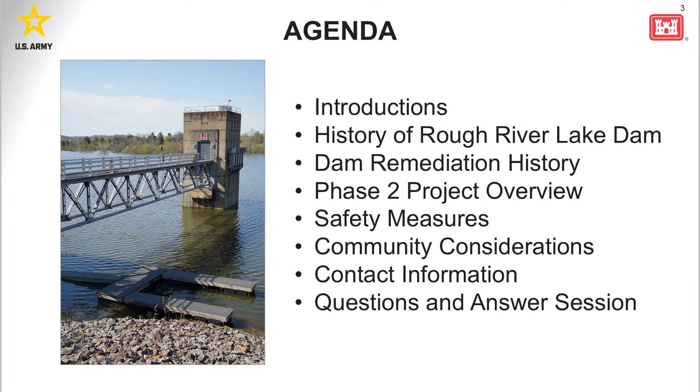My name is Steve Durrett. I am the project manager for this project, so I'm in charge of the funding and orchestrating all of the other pieces and parts associated with this project as we move through it. With that, I'm going to turn it over to Colonel Mann, commander of the Louisville District, to give a few words.

Lord, don't tell me how to do this. Hey, I appreciate everyone being here tonight, and I see you've got a good representation here, and I understand everybody wants us to get through it, so we cut it down from 250 slides of calculations. We've got it down to 12.

We definitely want to make sure everybody gets out to watch the State of the Union tonight. We do appreciate everyone being here. We have a good representation from the Corps. So you met our project manager, Mr. Steve Durrett, and we have Robbie Wheeler, who is the project engineer. Of course, we have John, who runs the park on a day-to-day basis. We've got other Corps folks, just put your hands up in the air here. So we've got operations folks, our smartest hydraulic engineer, Adam Conley, is here.

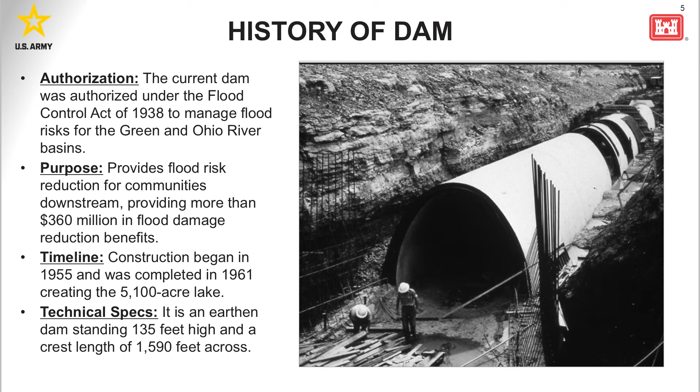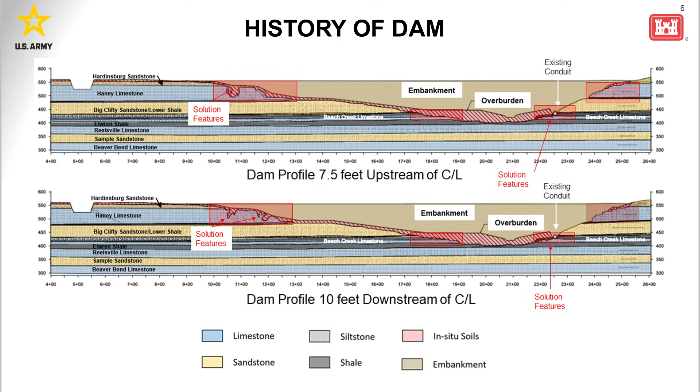And this little dot right over there, that is the existing conduit, and it's sitting right on top of that Beech Creek limestone. So these two formations are two of the reasons why we are really trying to repair this dam and make it safe again in our minds, and for you all to use for the next 50 to 100 years.

The remediation project, what got us to where we are? We started looking at this dam because of issues with instrumentation we had in the dam, monitoring the water levels, how the dam behaved, and so on and so forth.

Back in 2012, the first report was drafted. That report showed that we had some issues with the dam, which led us to do the first phase of the project. Many of you know phase 1A was to move the state highway to the upstream face of the dam. That was in preparation for 1B, which was to do the grouting across.

Drilling holes about every 5 to 10 feet across the entire center line of the dam, upstream and downstream. So we had 2 lines of holes every 10 feet along the crest of that dam, for 2 reasons. One was to understand what that limestone really looked like, how bad it was, where the voids were, both in the Haney as well as the Beech Creek.

The second piece of that is, since you already had a hole in the ground, let's fill it full. We cleaned it out the best we could, and we filled it full of concrete, or what we call grout. Again, that is basically a patch. All we did was fill voids. We really didn't wash out any of the clay, which naturally washes out over time by Mother Nature and just water moving through the Earth's foundation. So that gave us the details we needed to understand.

The second problem of this project really revolved around this conduit. How do you get under the conduit? The original plan was to cut through this conduit, leave it active, cut through it, and then patch it when we were done. After getting reviewed by the Corps, as well as some outside experts we involved, that was not a good idea.

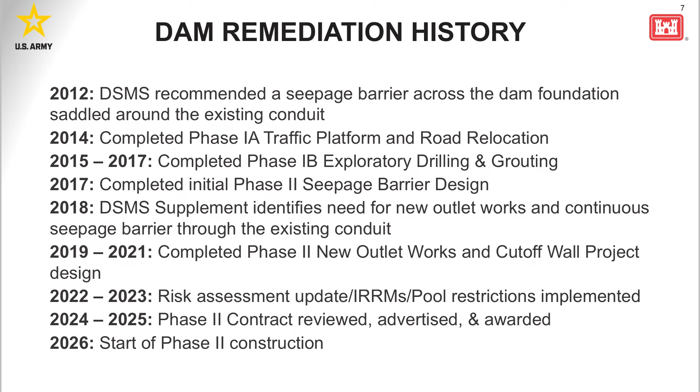And we have continued to look at this project over the years, as you can see from the dates on the slide. Again, I talked about left abutment and right abutment. I wanted to explain the nomenclature we use in the Corps. We always look downstream, that tells you what's left and what's right. So when we refer to things and you hear the word left abutment, you just turn downstream, and left is left and right is right. That's probably the important thing.

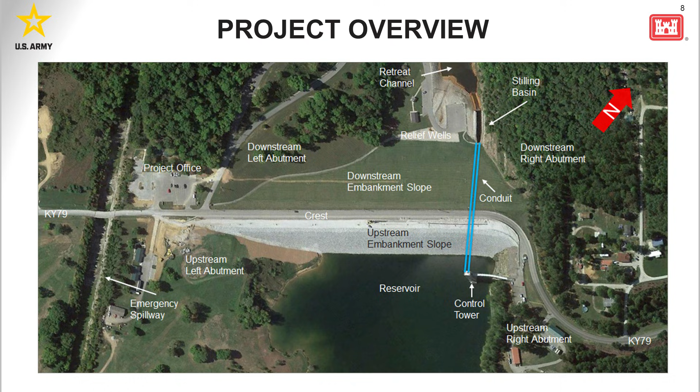The existing conduit and the control tower, the conduit will eventually be filled full of concrete and abandoned in place. Our new conduit will go across the left side of the dam, the left abutment of the dam. So we have awarded a contract. The contract is what the Corps of Engineers refers to as a base and option contract.

So we have awarded the base contract. The base contract is the control tower, the tunnel, the stilling basin, and the new retreat channel, the new exit channel into the existing river downstream. That is our base contract.

Option 1 will be to add the approach channel to get water from the lake into the control tower. As part of building the control tower, we will have to build what we call a cofferdam. It will be built initially across here to make sure that area of the control tower stays dry, so the contractor can work in the dry.

And we're not impacted by fluctuation in lake levels. Then option 2 is shown, which will be abandoning the existing tower and the conduit and filling in the stilling basin itself. So it's abandoning the existing structure.

And now this is where we get to option 3, the best part of the project. This is where we start reducing the risk of the project. This is where we start making it safe. Every panel we put in will improve the safety of the dam. So this option 3 is the new cutoff wall. This is what we're doing all of this other work for, is phase 3, to build this cutoff wall. This is what we need to have a safe dam again on this particular project.

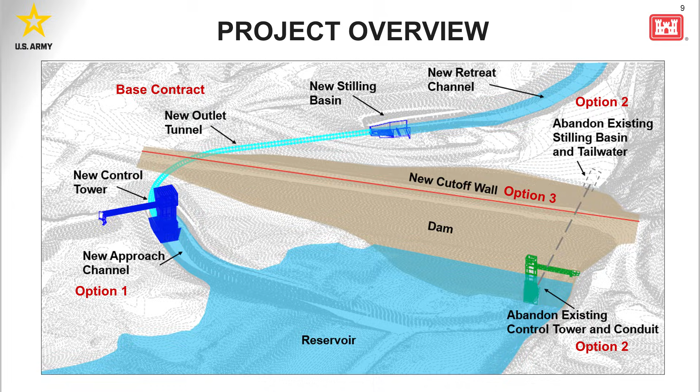So those are the pieces. We have only awarded the base contract option so far. The plan, if everything goes accordingly, is we'll be awarding option 1 later this fiscal year between now and September. Option 2 will be awarded in our fiscal year 27, and option 3 is planned to be awarded in fiscal year 28. That is what we have told the contractor we planned to do for the government, and that's what we intend to do.

As funding comes through, we will exercise these options. Our goal in the Louisville district is, as soon as we get money, we're going to exercise these options as soon as possible. I'm not going to wait for September 30th, the last day of the fiscal year, to exercise the option. If I get the money from the federal government, we're going to exercise the options. As soon as we get the funding in the door in Louisville, we're going to run it right back out the door and send it on towards the contractor.

All right, again, I talked some about the various options. The base contract, again, is just a new control tower, the outlet works, the tunnel, and the retreat channel itself.

Option 1 will involve some underwater blasting, so we'll talk about blasting here in a couple more slides to discuss what we're going to do to ensure safety. We communicate when those things are going to be happening. There'll be other blasting besides that intake channel — we'll have to blast in order to get down to the foundation level of the control tower as well. But option 1 is mainly that intake channel, underwater excavation.

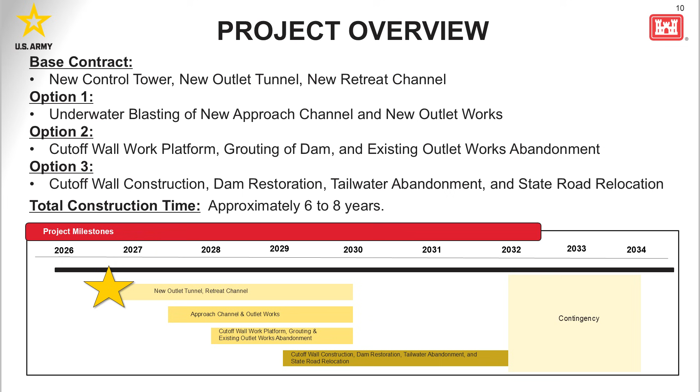Some of the features — I talked about a cofferdam that we're going to be building on the upstream left abutment. This will basically be in the pool, not in the water as it sits today. But if we ever had a flood like we did in April, the water would reach the top of this cofferdam that we'll put around the work area. It's going to be relatively small — it'll look massive, but from a cofferdam perspective, it's a relatively small one.

It will keep the work area dry so the contractor can pretty much work year-round, unless we have another flood like last April, in which case he'll get washed out and we'll have to fill it, drain it, pump it dry, and all that other stuff that goes with it.

Then he'll start seeing some haul activity. So some of the things you're going to be seeing — tree removal. We're going to be doing that in March. His plan is to start tree removal in March.

These are the activities you're probably going to see over the summertime period. You'll start seeing construction trailers show up on site — down near the state road, to the left, I believe, is where the trailers are going.

The trailers will come in the May to July timeframe. You'll start seeing haul roads. We plan on minimizing the amount of crossings. People will still come to work using State Route 79, but the amount of construction equipment crossing directly over the road will be very minimal. We are planning on using the emergency spillway as the access route to go upstream to downstream. That is the intent — we do not plan on putting a construction crossing where we'd run trucks across the state highway all day long. So the intent is to move most of our heavy equipment, earth and rock, through the emergency spillway on an upstream to downstream basis, and try to stay off the state highway.

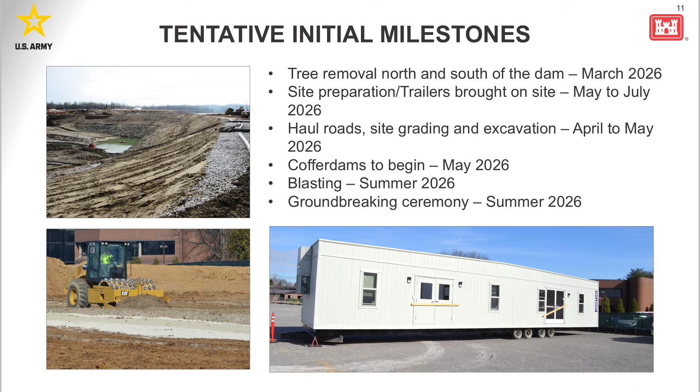Safety, as the commander mentioned, is very important to us. Many of you have seen those little white pipes that stick up on the downstream side of the dam. Those are what we call piezometers and other instrumentation to monitor the foundation of the dam itself. They monitor the dam and the various formations in that foundation.

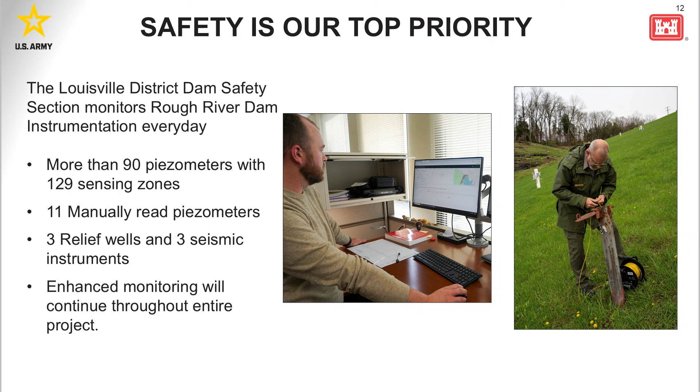We have over 90 piezometers or monitoring points in that dam, all automated. We can see that data in the district office every 15 seconds if we want, or every 5 seconds if we want. When we had a flood, we had somebody looking at this data twice a day. This is something we watch all the time. If it's not flooding, we still look at it every day, but if it's flooding, we look at it several times a day. So this is automated.

This information is actually being looked at, and it's not just by the Corps. Our operations team is out there looking at the dam. We also have one of our partners, the U.S. Geological Survey, which is very good with this kind of automation technology. They are the ones that maintain all of this stuff for us. We pay them, they come out and maintain it. If an instrument goes bad, they fix it. So we have them as part of our team as well.

The contractor, once he's up and running, will also be monitoring this stuff. So you're not just going to have one set of eyeballs in the Louisville district, you actually have three sets of eyes looking at this data, and they can look at it anytime they want by logging into their computer. This is part of our safety protocol, that we monitor this constantly. If instruments go bad, they get fixed within a week, we're replacing and fixing them, so they don't stay out of service very long.

All right, the tailwater area, many of you may have realized, has been closed. That is part of the contractor's construction work limits. He's going to be moving equipment in and around and clearing trees, so the tailwater area is basically going to be closed for the life of the construction project. That shouldn't impact much, but he needs that area, and we don't want people driving a car or kids around construction equipment. That just doesn't go good together. So we've closed the tailwater area. That closure happened around the first part of February.

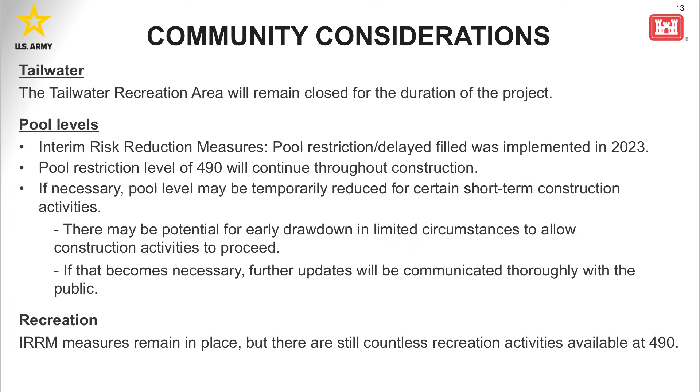So the interim risk reduction measures that we still have in place, most of these were communicated with you all back in 2023, are still going to stay in place. They will be here through the life of the contract.

All right, the blasting. There will probably be blasting in a couple of different areas of the project. The intake channel, which will have the control tower above, will have blasting, including underwater blasting. And the tailwater area where the new stilling basin is going to be will have some blasting. All of those will be coordinated, they have to be well coordinated.

They'll be communicated. We have on the drawings a blast radius for each of those zones, and any structure within those radiuses will be communicated with weeks prior to that blast actually happening. So if your house, or you happen to live in one of those zones, don't be surprised if you get a phone call or an email or somebody knocks on your door. I want you to be aware that you're going to get notified that these blasts will occur. We don't want anybody to be shocked that all of a sudden your floor shakes and you didn't know it was going to go on. So all this will be coordinated as they get done.

Again, safety is our priority. We want to control the blast so that all that rock stays where it's supposed to stay and doesn't go flying anywhere. All right, traffic.

Like I said, there's going to be a lot of construction crew workers on the project from time to time, and you'll see more traffic on 79, just people going to work. So just be aware of that. There also may be some rolling roadblocks required for some of the blasting activities, just because that state highway is going to be within 1,500 feet, actually within a couple hundred feet, of the control tower. So you will have to have rolling roadblocks that we literally will stop traffic for a period of time.

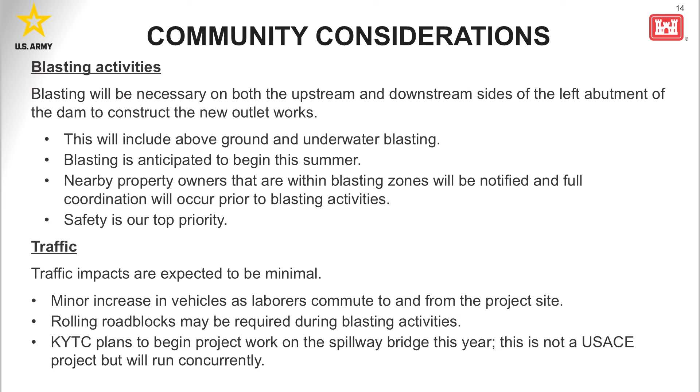They're going to go to a one-lane road and probably have traffic signs on both ends with stop and go, so that's something else. I just wanted you to know about it. But this is not us, so don't call us about this one, okay?